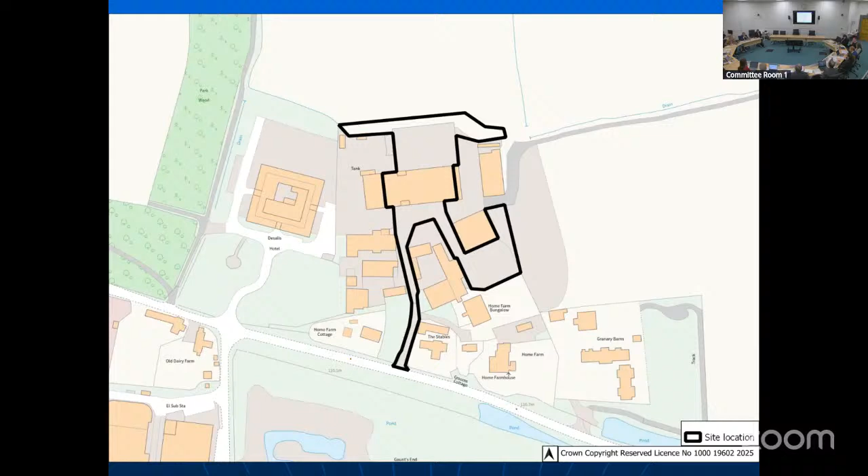The site itself is located on the north side of Hall Road and situated within a group of buildings collectively known as Home Farm. The site shares an access just off of Hall Road with a number of other commercial businesses which occupy the other buildings within the Home Farm complex.

This includes a grab hire company and a construction and carpentry business. There is a hotel on the western side, about 50 metres west of the site - this is the Desalis Hotel. There are a number of residential properties within a 100-metre radius of the site, the closest being Home Farm Bungalow, located just here.

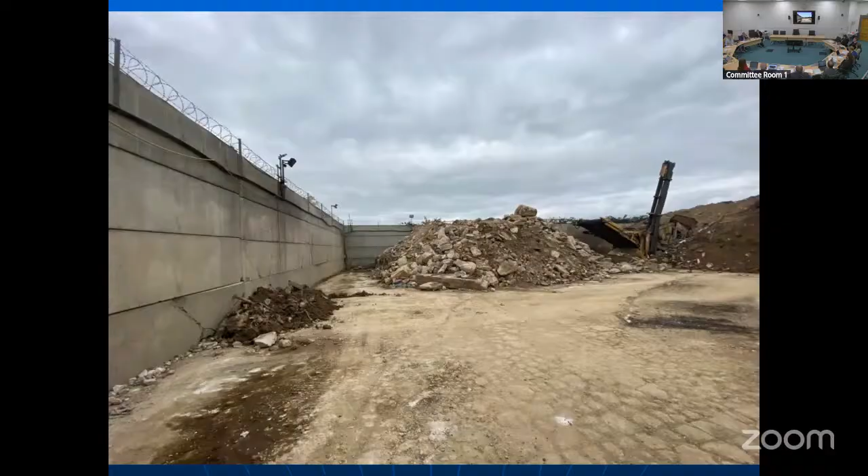The rear is the open air crushing and screening area with the concrete wall panelling, and you can see the operational area there for the main operation.

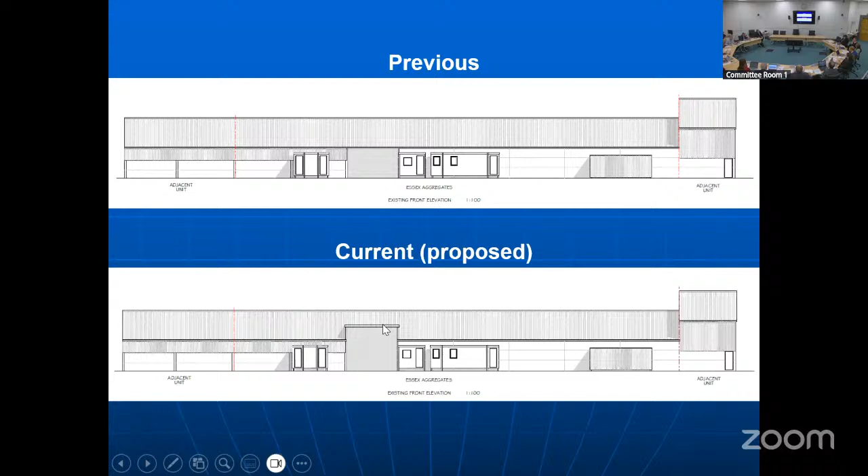In terms of the raised access of the building, just to show what those changes were, the top drawing here was the previous elevation - this is the front elevation. You can see the site office in front of the building, so the entranceway is the only change here. It's the raised eaves to allow access for HGV tipper lorries to get in and out, proposed on the front and rear entrances of the building.

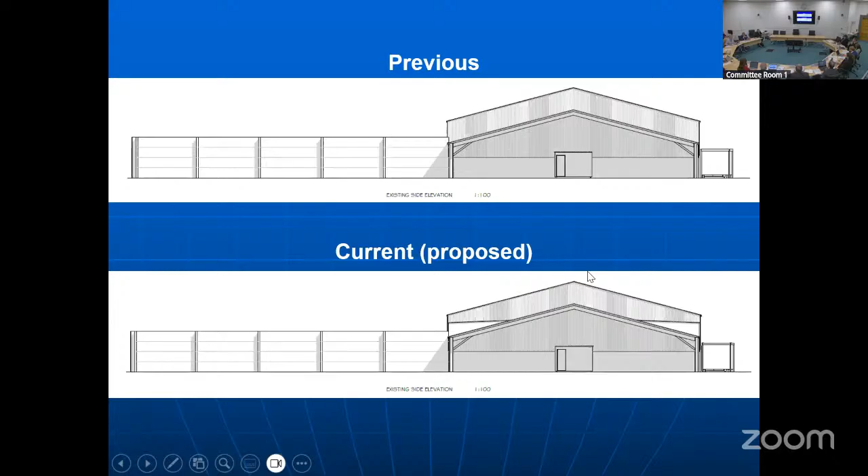Again, just to show a side view, you can see the previous elevation roof line, and the drawing shows the current raised eaves for the entranceway. The actual maximum height of the building has not increased.

We have received 18 letters of representation, 16 against, 2 in support. Elsenham Parish Council have stated no objection, though they have requested reduced hours of operation.

Letters of representation cover a range of different planning issues, all summarised in the report on page 44 of the agenda. In principle, the proposed use is considered acceptable in this location when assessed against policies 5 and 6 within the local plan.

It's considered to fall under the category of previously developed land, and whilst not an allocated employment area, it does benefit from historic permissions allowing general industry, storage and distribution, which are considered more compatible with a waste use. The site is located within the countryside, as per the local plan. However, it is within a pocket of development with a long-established commercial use, where commercial activity has existed for many decades.

Uttlesford District Council have not raised any objection to the proposal.

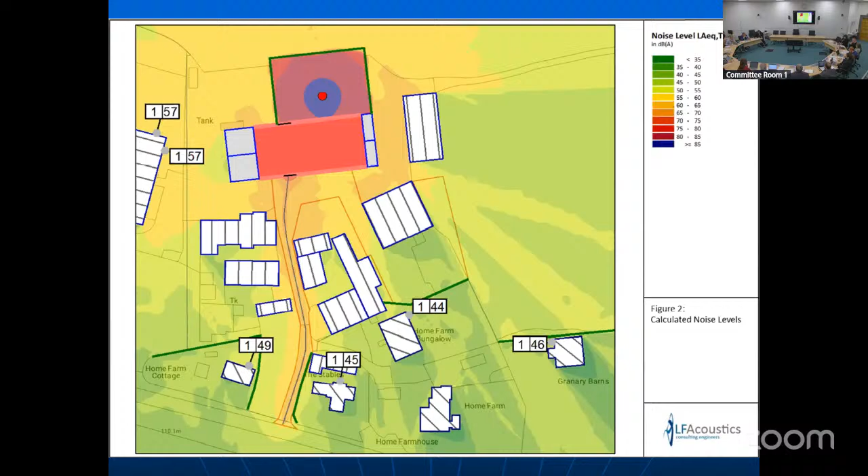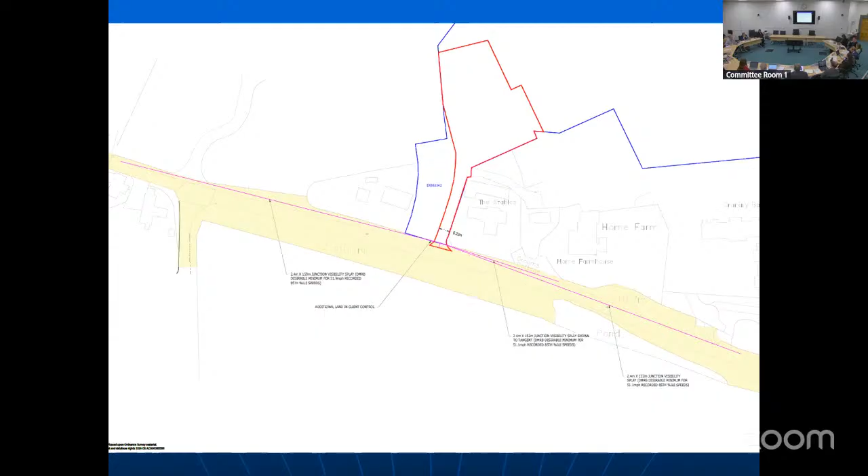This drawing shows the achievable visibility splays which have been provided by the applicant, which the Highway Authority considered to be sufficient and raised no objection on these grounds.

This initial concern was raised by ourselves and the Highway Authority. It was requested that the applicant amend the access to widen it to 6 metres for at least the first 10 metres of the access. This has been agreed with the applicant, who have now amended the application to ensure the access is widened to 6 metres.

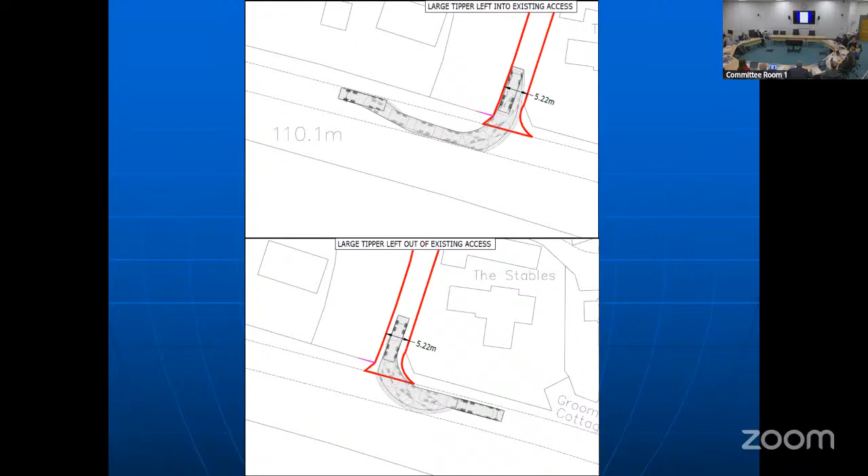It's considered that with this width and the visibility splays that have been demonstrated, the access is acceptable, and the straightness of Hall Road here is considered sufficient for line of sight in both directions. This should reduce the need for vehicles to take such a wide turning circle.

So in terms of parking, just to quickly touch on this: the applicant suggests they have a maximum of 15 HGVs that would need to park on site overnight, as well as the parking in front of the office here. They suggest there's up to 25 staff cars or staff personal vehicles.

Obviously, you can see that there aren't 25 spaces in the staff car parking area — they suggest there are 9 spaces here, and that an overflow would be provided in the vehicle parking area alongside the up to 15 HGVs. We've considered that this area is sufficient for that number of vehicles. However, we have requested a condition to provide a plan showing these spaces and indicating the parking areas.

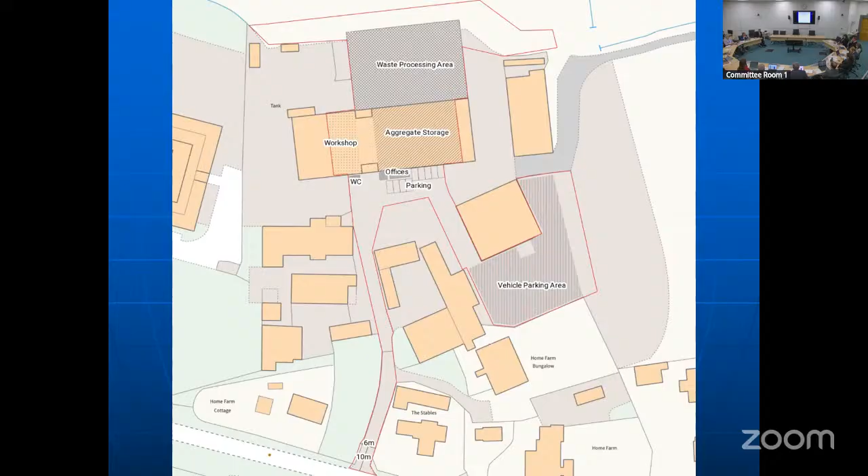And finally, just on visual impacts and landscaping: the applicant has provided an indicative landscaping plan here, although we have requested a more detailed and full landscaping plan with planting and species detail.

There are a couple of public rights-of-way which potentially have views of the site. Again, this is a change of use — there's no new development in terms of physical building other than the vehicle parking area, which was extended, we think, in 2023 by about half a hectare.

So this section is considered to be new development, and we have considered the visual impacts there. But we've considered that the proposed landscaping — a proposed hedgerow along the east side of the parking area, and an existing bund on the north side of the waste processing area, which was part of the previous permission and has already been installed — with planting proposed on this bund as well, which would be delivered by condition.

So to conclude, the location is considered acceptable in principle. It's in accordance with the locational criteria within the waste local plan. Vehicle movement numbers are considered reasonable, and the implementation of a multitude of planning conditions are considered adequate enough to control potential impacts on the development. The recommendation is therefore approval subject to conditions.

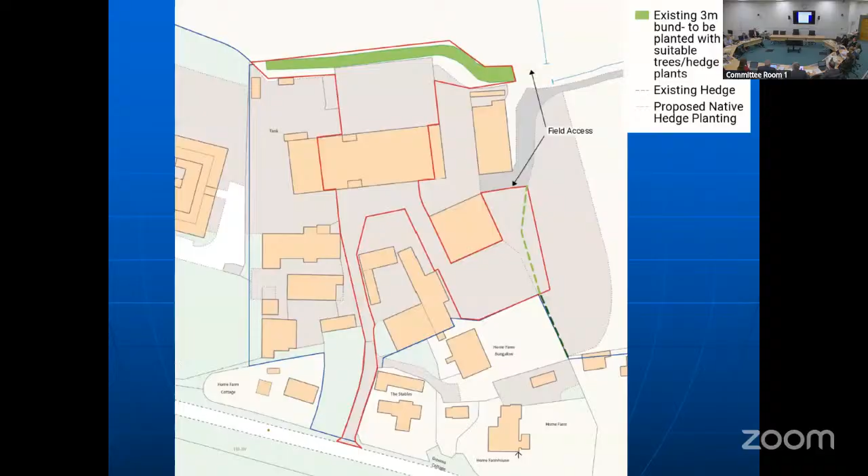Yes, I'm very interested. I've read this two or three times and am very interested in the presentation. The first question I had is about the retrospective aspect, and this applies not just to this application but to all applications. It seems to me it's a bit wrong that we find something's wrong and then later try to put it right, which seems the wrong way around. If the applicants are professional enough, how would they find out, through you Chair, what the requirements of our rules are? Is there adequate means to find that out, or do they have to come asking for that information?

That's the first question. And the second one, in the report it mentions bird strikes, reducing risk. You didn't mention that in any mitigations, and I just wondered how real that risk is if there's pollution in the items or polluted items that birds would feed off. I wouldn't want to lose an aircraft, and nor would the operators, of course, and nor would we. We want to mitigate that risk.

But is the risk so minimal you didn't want to put a mitigation in, Chair? Thank you, Councillor Harris. I think everybody shares your frustration about the retrospective issue, but sadly it's something that anybody is perfectly entitled to do. I'll hand over to Tom for a fuller response. Thank you, Chairman. Just to echo that, Councillor Harris, yes, it is the planning system we operate under. Applicants are entitled to submit retrospective planning applications.